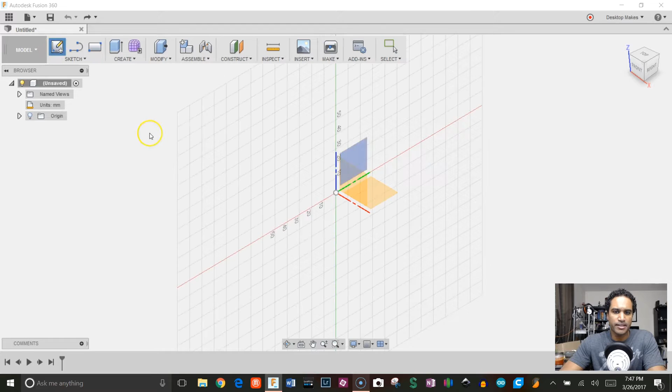So all right, let's go ahead and jump into Fusion. We'll start with a sketch on the XY plane, and we'll go ahead and draw a polygon. So we'll choose circumscribed polygon, and we'll start at the origin, and I'm gonna give this a radius of 25 millimeters. So first I'm just gonna place it, and then I'm gonna hit D for dimension and dimension that from the origin to that top line, and then enter 25 millimeters.

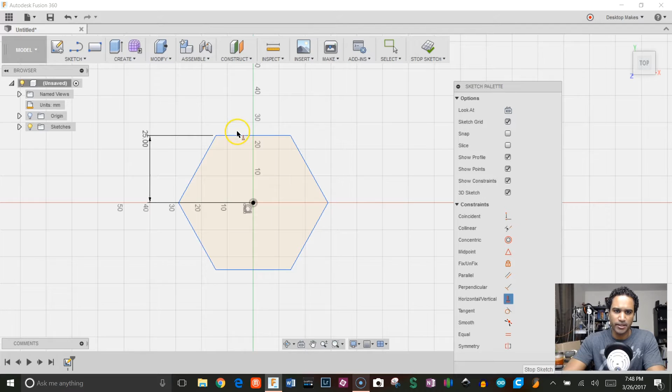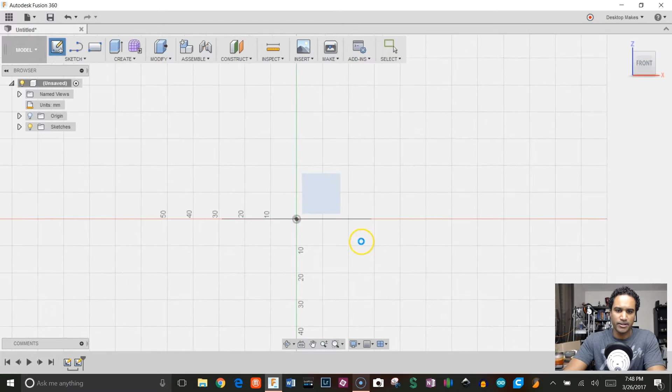And to fully constrain it, I'm just going to grab a horizontal constraint here and constrain that horizontal top line, and click stop sketch. Next we're going to draw a vertical line perpendicular to that original sketch. So we'll go to create sketch, and I'll select this ZX plane here and grab the line tool, and we'll start at the origin, and we'll make this the height that we want our cylinder to be. So I'm just going to enter 100 millimeters here and then stop sketch.

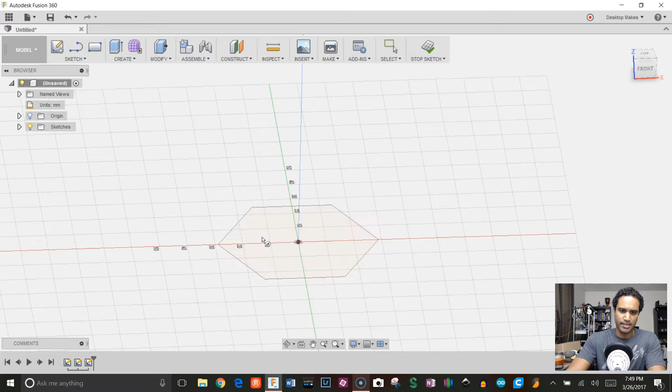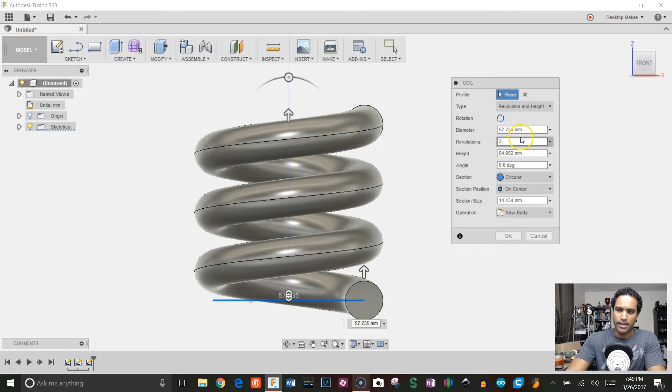Now we're ready to put in our coil. So we'll go to create coil, and I'm going to select that polygon profile. So we'll choose that hexagon, and let's go to a top view, and I'm just going to start at the center, and I'm going to snap it to the corner here. Alright, so now that we have our coil and we have this dialog box, there's a few things I'm going to change. First, I'm going to choose revolution and height here under type, and for diameter I'm going to leave that the same. Revolutions, I'm going to make this 0.5.

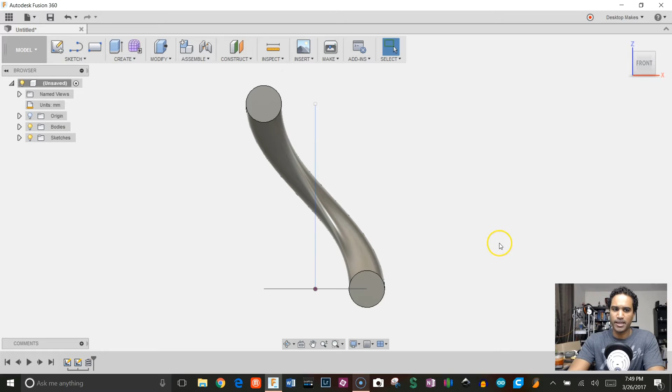Let's see, height, we're going to choose the height of our vertical line, which was 100 millimeters, and section size, I'm going to make this 20. So you can obviously play around with these parameters, but I'm going to go with this and click OK. And there's our coil. So here's the magic right here.

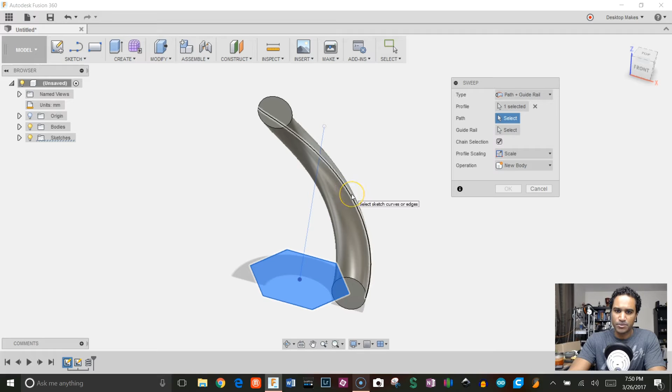We can now go ahead and choose create and go down to sweep. And for the type, we're going to select path and guide rail. For the profile, we'll choose our hexagon. For our path, notice if we hover over our coil, we get this line that represents that curvature. So we'll choose that. And for our guide rail, we'll select this vertical line. Now all we're going to do is change this from cut to new body and click OK. And we can see we have our two different bodies there, and we created this nice coil feature.

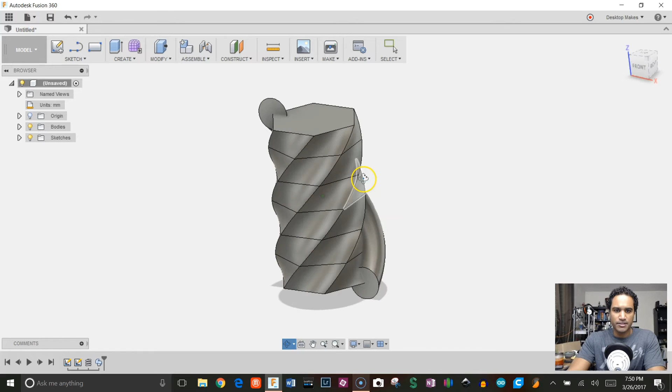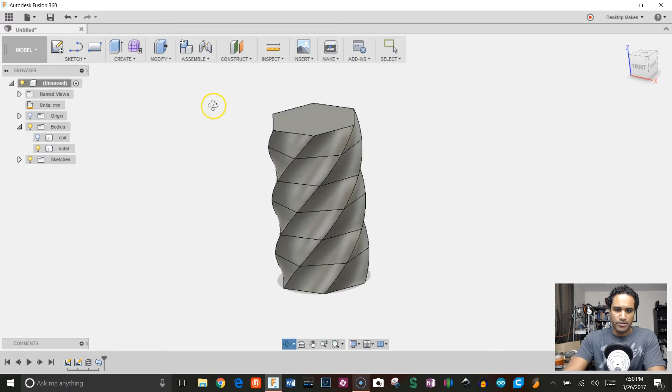So let's go ahead and name these. So this first body is our coil, so we'll just call it coil. Our second body, I'm gonna make this our outer profile, or our outer cylinder, so I'm just gonna call this one outer. Alright, and I don't need to see the coil, so I'm just gonna uncheck that. Let's also go ahead and give this a color. So I'm going to hit A for appearance. We'll go down to plastic, glossy, and we'll make this blue.

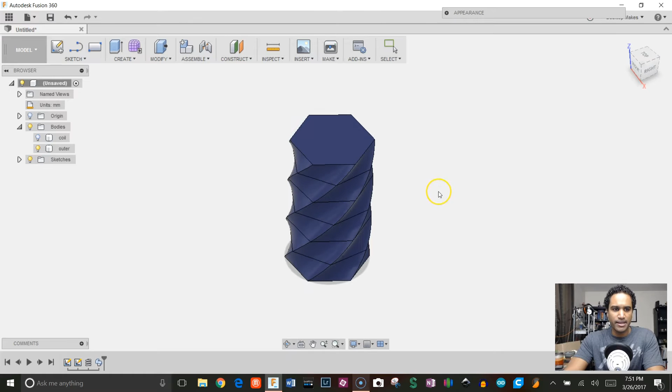Okay, so now let's go ahead and make the inner cylinder. And to do that, all I'm going to do is go back to that original sketch, double click it. Let's try that again. And we're going to enter an offset. So I'm going to choose sketch, offset, and I'm going to give this an offset of -1 millimeters.

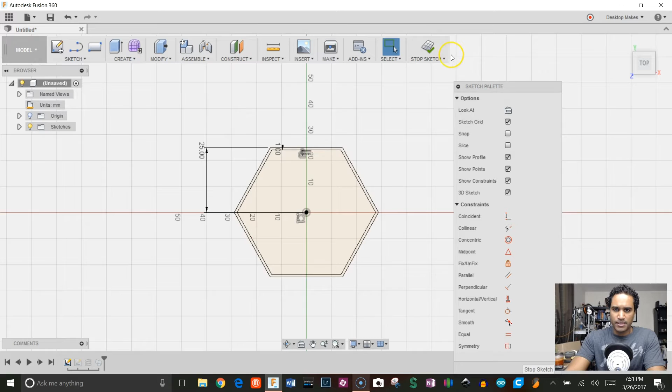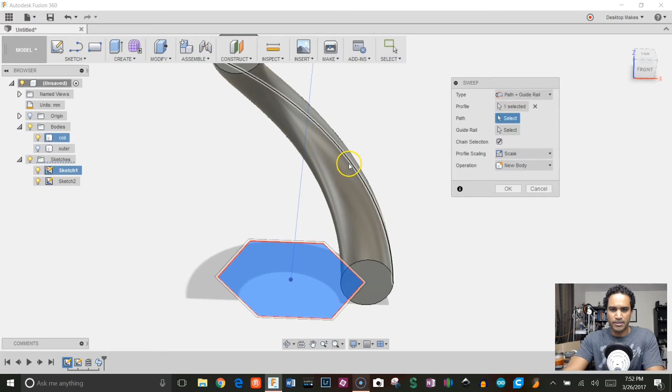Stop sketch, and we're going to basically do the same thing. So I'm going to need to see just my coil and my two sketches. So now for our sweep, we'll go to create sweep. We're going to make sure we only select that inner profile. And again, our path is going to be that coil. Our guide rail is going to be this vertical line. And again, we'll change this from join to new body and click OK.

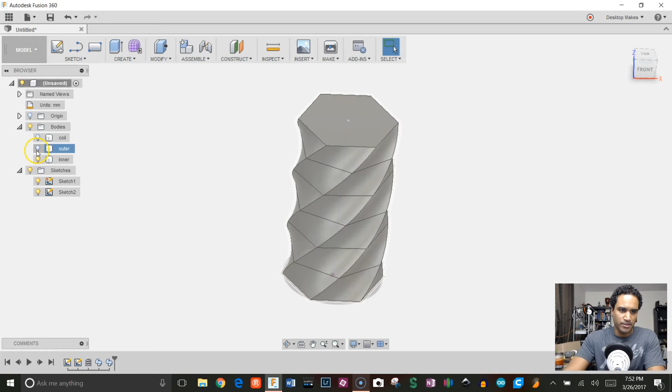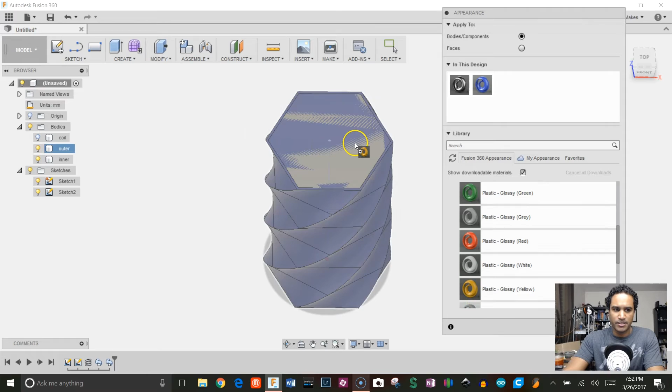So now I'm going to get rid of coil, and instead of body 3, we'll go ahead and call this inner. Okay, so now I can show my outer body, my inner body, and if I look at the top, you can see, well, here, let's go ahead and give it a different color so it makes it easier to see. So I'm going to hit A for appearance, expand it by hitting this little plus sign, and I'll make this one yellow. So I'm just going to grab it, actually bring it here to my body on the browser and make that yellow. Click OK.

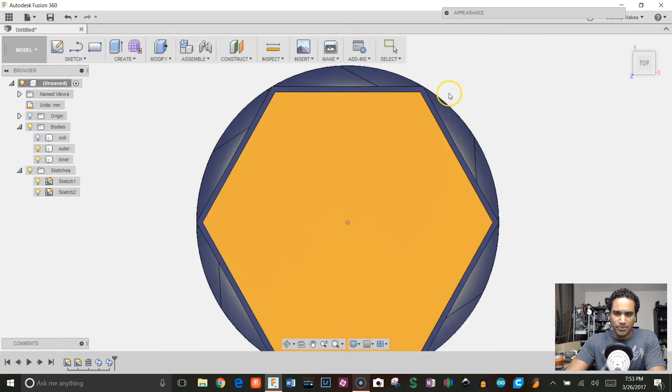Now we get this weird kind of color thing happening because they're both occupying the same space there. But you can see, if I go to a top view, you can see our offset there that we gave it. So we have the outer and our inner coil. So if we want to move this over, I can just right click on inner and go down to move, and then I'm just going to drag this arrow over, click OK, and we can see our two bodies.

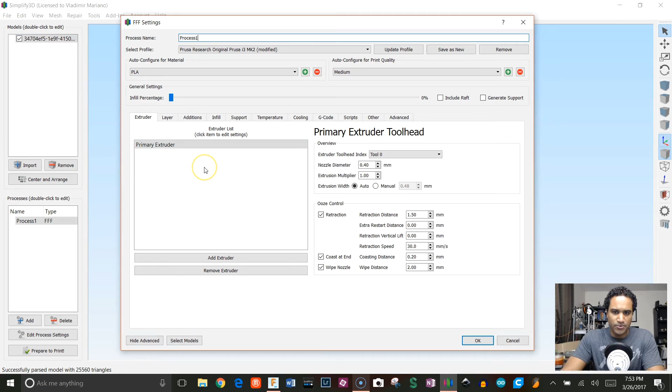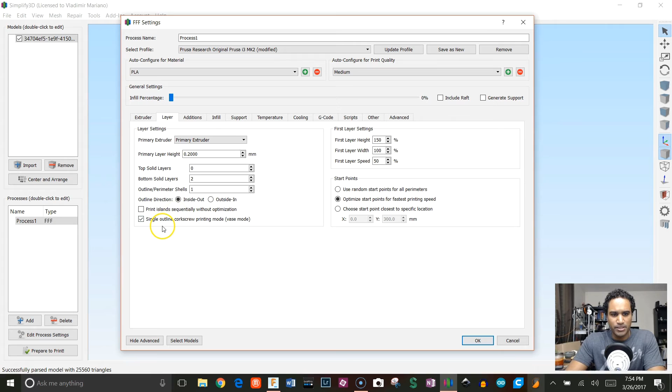So I'm ready to send this to the printer now, so we'll go ahead and choose make 3D print, select our body, click OK. I'm going to bring this into Simplify3D. I'm going to get rid of our last object there by clicking remove. And so if I click on processes, again, if you watched my last video, this is kind of the same thing. You want to go into layer and choose a single corkscrew printing mode, vase mode. In other slicers, like Slic3r for example, it'll just say vase mode. But whatever you're using, there should be an option. I think most slicers have an option of just printing it in vase mode, because even though we're sending it a solid, it'll just print the outer perimeter.

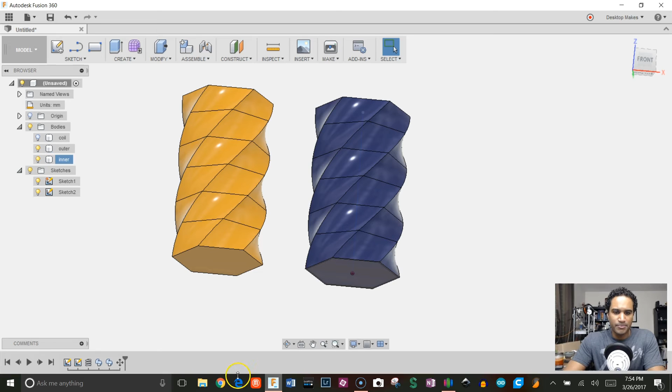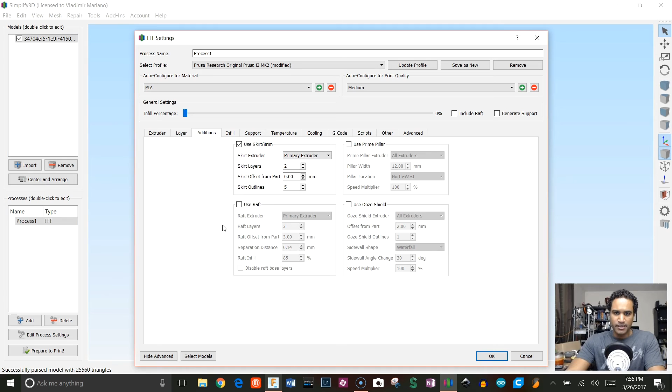So one other thing I did with this is under additions, I could have gone ahead and modeled a bottom here or a lip to easily pull this out and in, but I chose to actually do that in the slicer. So if I go to additions, as far as skirt layers, I'm going to give this 2, and then skirt outlines, I'll raise it one more and give it 5. So what it's doing is it's going to create a brim, which is going to help it stick, but it's also going to provide a nice little lip to be able to grab, to pull it apart and back together. So just a neat trick to do that instead of actually modeling it, because you can't actually have a vase mode with flat surfaces. That's just not going to work. So that's the only thing I'm going to change there.

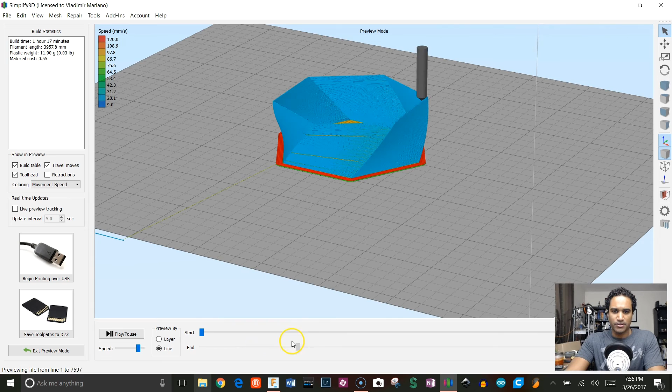Click OK, and let's watch the simulation here. So if I click this forward, you can see that it created that brim right there. And you can change that to make it however thick you want. And so let's go all the way up. Okay, that's looking pretty good. So now I can just go ahead and click Save Toolpath to Disk.

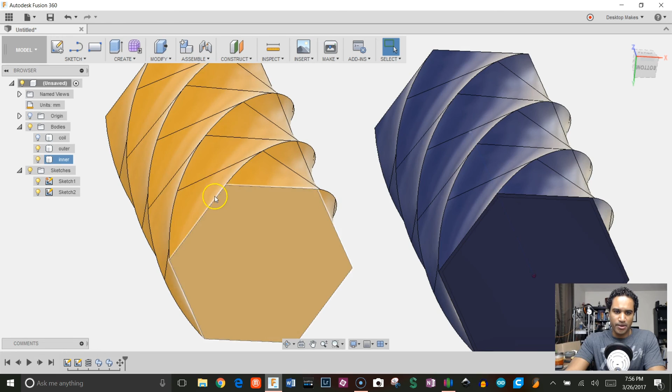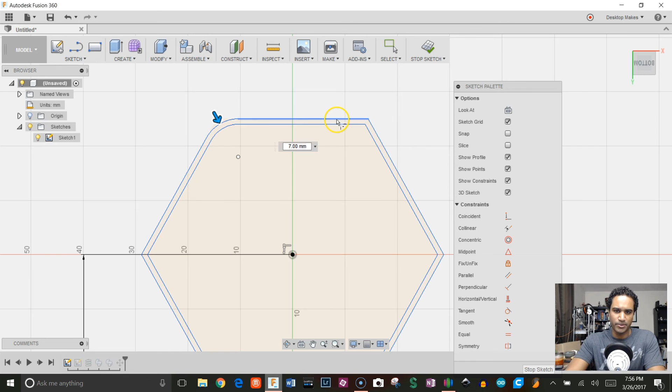One thing I want to show you actually, I tried also giving this more of a rounder curve to it. And that's pretty easy to do. So within that sketch, if you just go to Sketch, Fillet, we can fillet these corners. And notice, because this was an offset, the inner one, it'll automatically update to follow that offset. So if you want more of a roundedness to it, you can just do that.

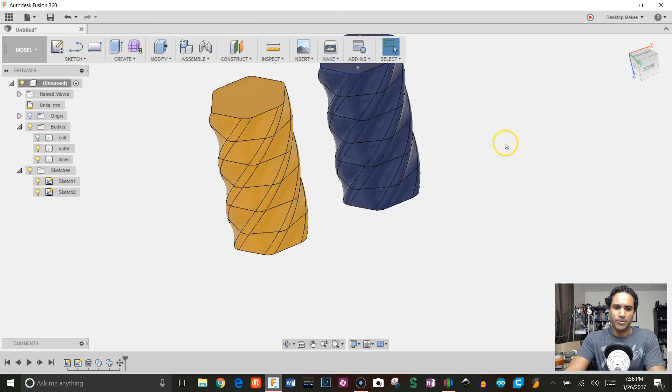I'll give it a fillet of 8 millimeters, hit enter, stop sketch, and you can see now we've got more of a rounded shape to this. I tried it both ways, they both work. The other way works just as well, so you can go ahead and experiment with that.